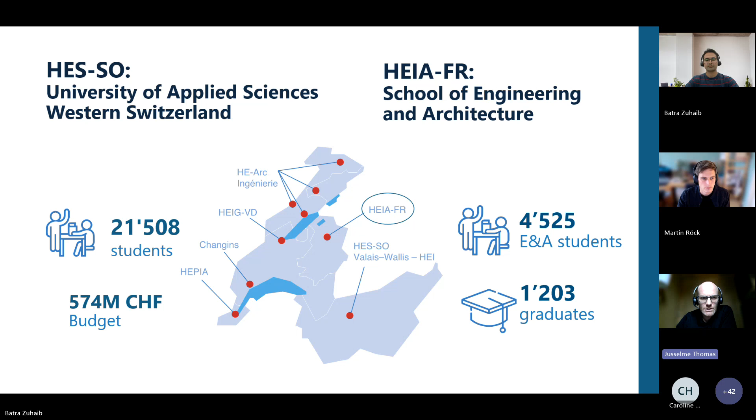As a short introduction, I would like to introduce our institution. So we are part of the University of Applied Science of Western Switzerland, and more specifically, we are the School of Engineering and Architecture of Fribourg. We have 10 research institutes, and we are part of the Energy Institute in between industrial technologies and construction and environment. At the Energy Institute, we also focus on the applied research in energy systems.

On my side, I have a contribution at the building scale and more specifically about life cycle assessment of buildings, carbon budget of buildings, early design methods, including the life cycle assessment and environmental impacts. We are part of a couple of research projects, like, for instance, the BioLoop projects that were focusing on bio-based material and their contribution into the biogenic carbon storage effects at the building, but also the building stock scale.

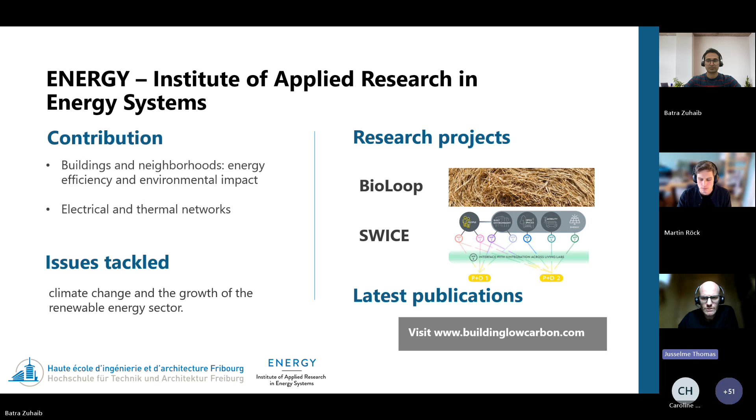So we are here today because, as we all know, we need to meet climate goals. And the building environment is responsible for 40% of the climate change, and more specifically 10% for the building materials themselves, with what we call the gray energy or the embedded emissions. And we are in a really specific sector with a large lifespan of buildings where the inertia to change buildings and to decarbonize this building sector is really challenging, with a very long and complex value chain.

And we feel and believe that there is a lack of awareness about the latest research outputs. And also we need to support policymakers and to fill policy gaps. So this is why we decided to start this webinar series by sharing our latest research findings, but also by inviting key researchers in that space. This is why we have Martin with us today.

So we also know that we have a kind of momentum at the European scale because we have the EPBD that will come into force in 2028 with buildings that are more than 1,000 square meters, with regulation that will be transposed in all the EU member states in 2026. In Switzerland, we have the chance now to have a norm, the SIA 390, that determines carbon thresholds for buildings. And we have progressive and new regulations in different European countries, starting from France, that have massively regulated this space in 2022.

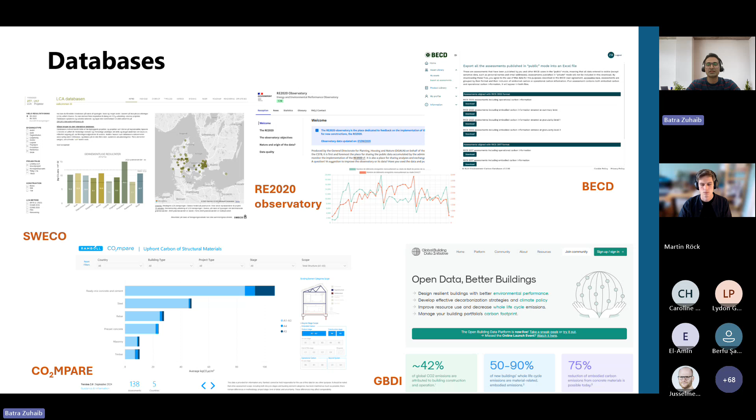We understand that there are some core challenges, and let's try to break them down. The main issues are data silos and fragmentation. Each country's database is very, very different, and there are different calculation methods at national level on whole life carbon assessment. We know there's a Dutch method versus the French method, and they're all different based on the climatic conditions. This causes the results to be really inconsistent.

And what is happening is that there are different tools, they give different results because the underlying assumptions are very different. The second most important issue that we are facing right now in looking into LCA data is the common schema or reporting schema, where a shared language is there for building LCA.

We have a very good example of BIM, where IFC formats have been used for more than a decade now, and it's used as a very common language in exchanging information between building information modeling users. Similarly, we are missing something like this at the global level, or I would say even at the European level. And this is one of the challenges, and there is this complexity around that, and we have to solve this complexity by research. We need data not only for submission, but it should also be structured, verifiable, and trustworthy.

We are having challenges in structuring LCA data because there are several types of different practices at national level. Some people are working only at a very coarse level, some are going into very much detail, some are reporting it in their national classification systems, whether it's architects or engineers. So there's a lot of, I would say, disaggregation in how things are reported and how they're understood, and often the quality of information is not very reliable.

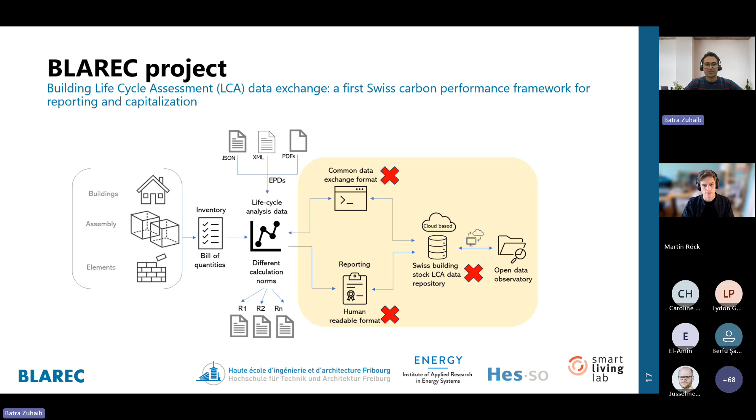Now, there is an approach that we are following. I would like to share that with you very briefly on the screen. In this, we are working with several LCA data, which we have collected from industry partners, and we are developing a dotLCA Python package, which includes a JSON schema. And also, we are applying large language models to really extract the data from what we have received from industry partners. We have included stakeholder feedback to understand how this schema should be arranged, and also develop a JSON, which is known as .lca, for data exchange and reporting.

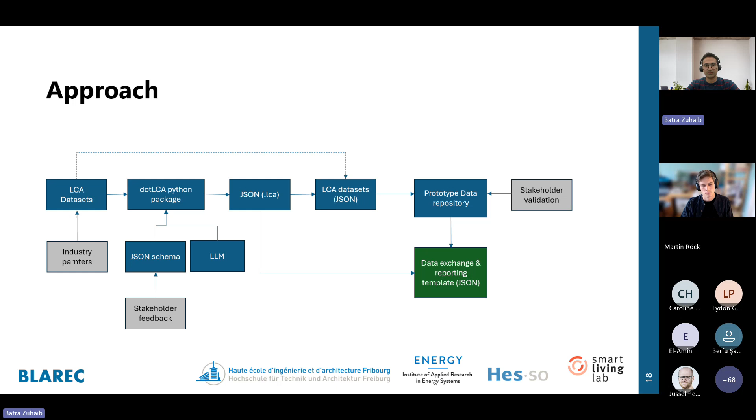Finally, using these JSONs, we will transform the data that we have into a prototype data repository. And as an outcome, we'll have a format which is tested on the data that we have received in this project. Building LCA data exchange is really important because there is a series of exchanges happening between different stakeholders, as we know, between engineers, real estate developers, investors, or even public authorities for their decision making. LCA data is the center point of a lot of stakeholders in decision making.

I think we need to really step up, understand the research course where we are working, and try to focus on these exchanges and try to develop solutions which are not only holistic in one way, but also focus on the issues that each of these stakeholders are facing. So we need to understand the value chain very clearly. I would like to share some examples of a survey that we conducted and is still ongoing. So these are some preliminary results.

And we asked different building professionals about the formats that they are using to exchange LCA data. It was very surprising to see, of course, no doubt, Excel files dominate the landscape, and PDF reports are second to none. So it is very, very challenging that these two formats are not really machine readable. It is very difficult to use them. They can be huge files and heavy files. Imagine tens of thousands of data existing in these kinds of formats. So we need to really solve this issue and have something which is easily interchangeable and interoperable.

We also asked some of the respondents about the common issues that they're facing while exchanging the data. One of the issues is, of course, the lack of clarity on assumptions and system boundaries. And we understand that in LCA, we have a lot of assumptions taking place, and these are often not reported in the reports that we have been submitting for building LCAs. So it is very important to overcome this issue. Missing, incomplete data: often there is not a lot of data which is required at granular level to understand LCAs. So this is something that we observed.

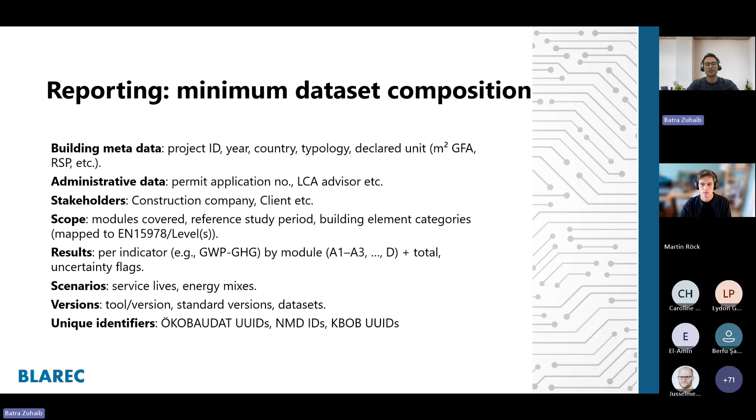So we have identified these requirements and we have started to work on building a schema in JSON. Also, one of the important things that we come across is building element classifications. This is one of the foundations of building LCAs. We know in different countries, there are different ways to create a bill of materials or bill of quantities. And this is the material level information, often classified as structural work or foundation work or painting work. There can be several categories in which it is identified.

But what we need to know is that across the world, there are so many different kinds of systems existing, which makes it practically impossible to translate one form of information from one country to another. That is why these classification systems hold a very important role in our understanding of how data is exchanged within the value chain. In our analysis, we have analyzed Uniclass, CoClass, ECCC systems, which are very widely used and often very comprehensive in reporting different products and materials and processes under pre-specified categories.

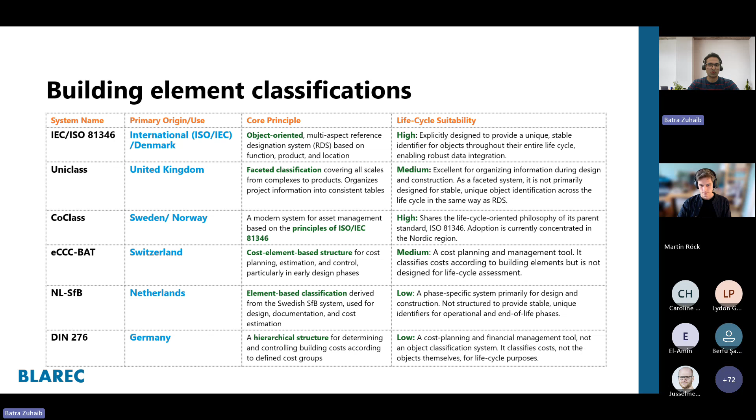This makes things a little bit easier to understand and classify materials in LCAs and also share them across the value chain. So this is something that we are analyzing in our work, and our structure of LCA data reporting and exchange will definitely be influenced by these building element classifications, which may in future be possible to exchange from one country to another, but that is a long way to go.

Finally, to wrap up, we know that building LCA is here to stay in the next decade. Our current reporting infrastructure is really not fit for purpose. So focusing on open standards, mandating machine-readable formats, and fostering an ecosystem of connected tools is what we need to really unlock the potential. We need to develop open standard schemas, based on XML or JSON, to share building level LCA results. What is also not yet in the picture is mandating in policy how these machine-readable formats should be used. Maybe EPBD could consider it as a recommendation and start influencing policymakers on using a specific format for exchanging this data.

So I believe we have several paths, encouraging even software developers to work with open APIs and try to exchange data in formats which are easily accessible and available. There are already some good practices in Denmark or in France in this direction. I think we need to learn from them. We need to use specific data converters, which are easily available and also connected to national portals who can use this information or exchange it with interoperability.

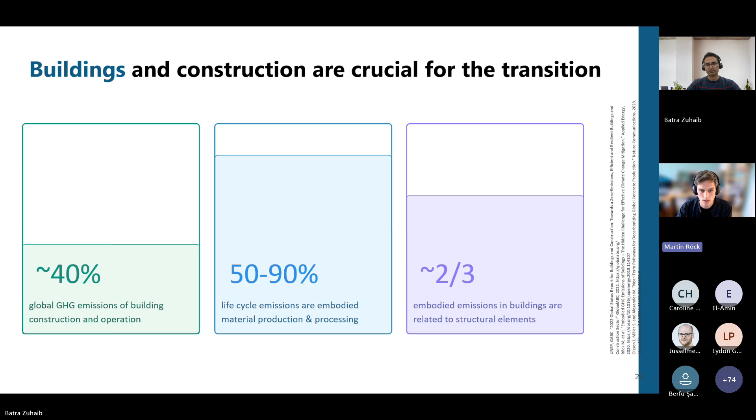So I will be brief on those because you already understand the context. The built environment is very relevant. We know it's around 40% of GHG emissions globally. We also know that, especially for new buildings, the embodied material-related emissions are of increasing importance. Our research shows that 50 up to 90% of life cycle emissions for new buildings are actually related to material production and processing. And within those embodied emissions, around two thirds are often linked to the structure. It depends on the complexity of the building system, but often the structure really plays a key role.

And now I realize that animations will not work well in this setting. Anyway, we will skip over this.

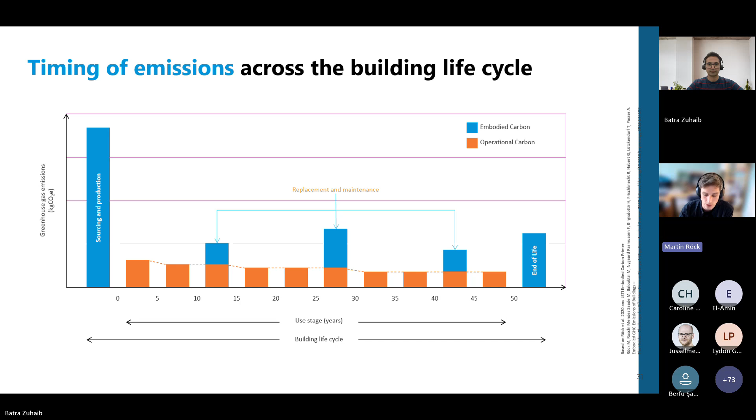And that's really also part of the reason why we call for action on embodied and whole life carbon emissions, especially for new construction today. Because the thing is, we know that there are many solutions already available to reduce, especially those embodied carbon emissions. Great progress has been made already on operational carbon, but on embodied carbon, there are also great solutions available. We could reduce embodied emissions by 50 to 75% with the strategies that we have today.

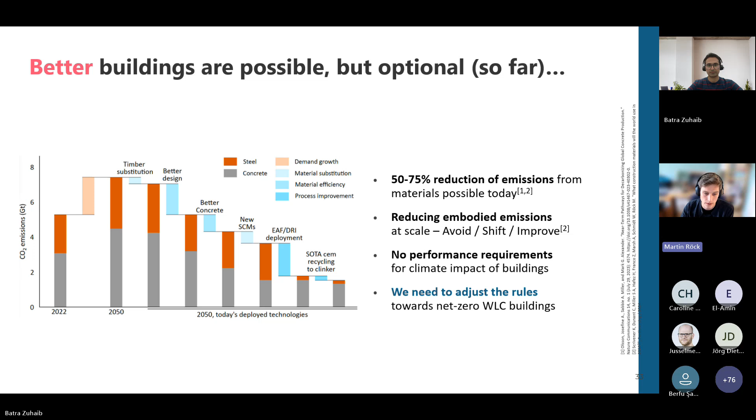The problem, as Zuhaib already said, is that we currently don't really have performance requirements on these embodied carbon emissions in most parts of the world. And that is why also my work and our work has focused on really adjusting the rules towards net zero whole life carbon buildings and making sure that we inform policy in a way that increasingly incorporates these embodied carbon emissions in the regulation. Zuhaib already spoke briefly on the European perspective.

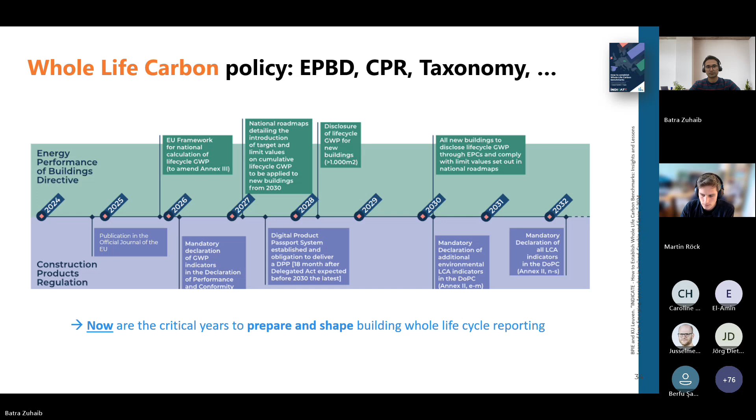Part of our work in accelerating the uptake of these forthcoming regulations and also informing these requirements is the Indicate framework, which is a framework for accelerating whole life carbon data and policy creation. And those of you who are interested, you can look it up, indicatedata.com. It's a framework that we are now deploying in the second phase. We have worked with 3 pilot countries, Ireland, Czechia, and Spain in the first pilot.

Now in the current pilot funded under the European LIFE program, we're working with partners in Italy, Croatia, Austria, Hungary, and Luxembourg to really support them on this duality of developing the data and the assessment methods on the one hand, while also developing really specific whole life carbon policy proposals and working with stakeholders, also with policymakers, towards policies and the implementation of these European trajectories at the national level.

Now, what we're also doing in parallel, not just on the individual building level, but we're also working at the building stock level, because for policymakers, it's quite relevant to understand, yes, on one hand, what can be done on the individual building level, but often that is quite different from what can be done at scale at the national or the European building stock.

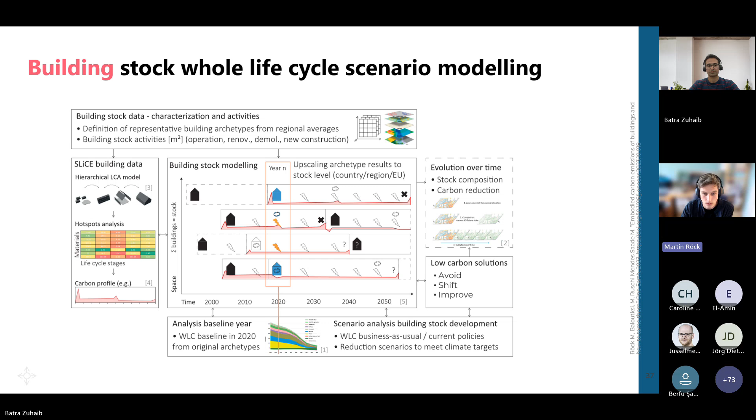So we model all of this at the national and transnational scale to really then investigate the evolution over time and the potential of different low carbon solutions to really reduce emissions or maybe even activate carbon removals at the European and at the member state level. The way that we go about this is by modeling archetypes. So we build on statistical analysis of the construction activity, of the composition of the European building stock.

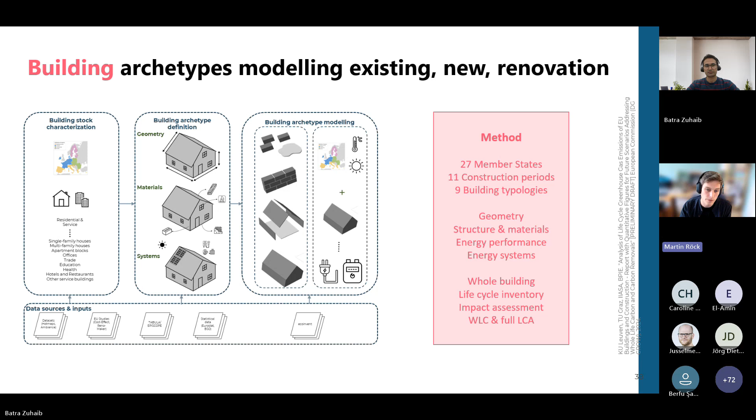And in this project that I'm pointing to here, you can again find it online. It's for the European Commission DG GROW, a preparatory action on the life cycle emissions and removal potentials of European construction. For this project, we really modeled archetypes for all the 27 member states, considering different construction periods, 11 periods, 9 different building typologies, also going into the nuances of geometry, of structure and materials, of different energy performance and energy systems to really model comprehensive life cycle inventories and then conduct whole life carbon assessments and LCAs.

Now, the final reports of this project are already delivered, and there are a number of publications that will be coming forward. So this is just to give you an idea and keep you excited about what's coming, because there are around 10,000 building LCAs that we modeled and that we plan to publish to a large degree in the coming months, so that you can also look into these numbers and understand the contribution of different materials, the contribution of different building elements, really benchmark this data for different building types across different member states.

We also have a specific analysis on the carbon uptake potential, and so in that sense, the carbon removal potential of different types of buildings, considering both biogenic removals as well as mineral carbonation and mineral removals. I think that is also giving quite an interesting insight into the potential and also the limitations of these different approaches.

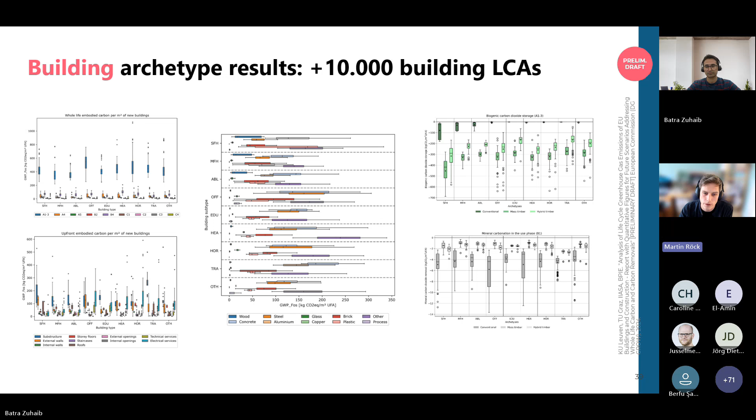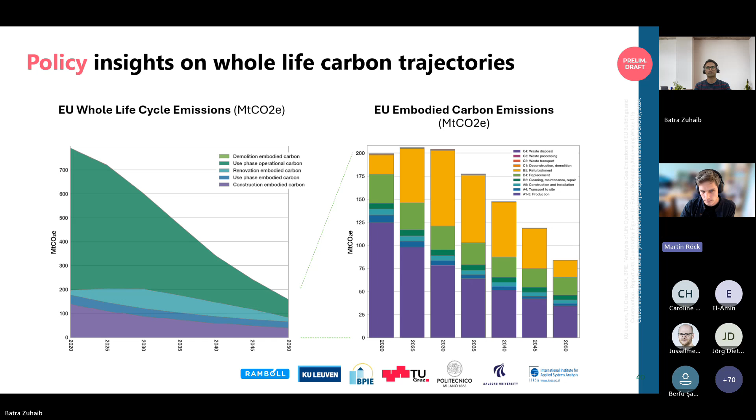Now, these results for this particular scenario, as well as for other scenarios, are available online. I invite you all to have a look at the Whole Life Carbon Scenario Explorer. We have a dedicated website that will point you to an interactive dashboard where you can explore different scenarios, play around with different strategies, activate them to a higher or lower degree, and then really explore the results in your own time. You can filter them for individual member states or for individual building parts, look at different materials, different life cycle stages. All of this.

And this is available also through the QR code. We also have a paper pending. The code for this is open source. So if you're working on something similar, you can build on it. Feel free to get in touch if you want to learn more about our experience in also developing this tool, which is really intended to support policymakers.

Now, I'm moving away from Europe because the reality is that the global floor area is expected to double, yes, but it's expected to double not in Europe and not in Northern America, but actually in other places. It's expected to increase a lot in places like India. It's expected to increase dramatically across the different parts of Africa. And that is part of the reason why our work in recent years has moved increasingly to the global level and to partnerships with Global South actors. Because the new construction will really mostly happen in the Global South.

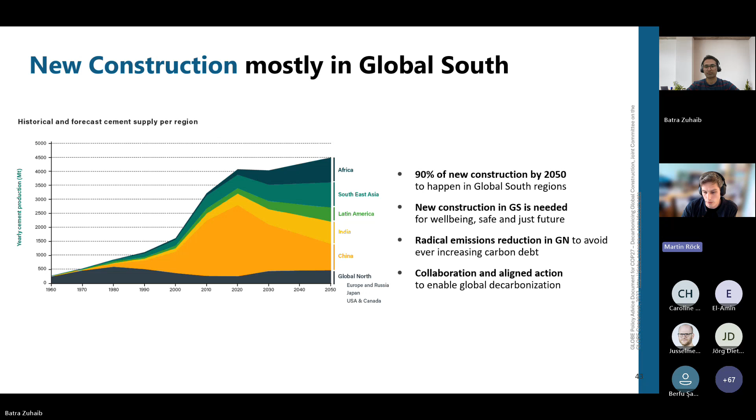Now, to work with partners globally and in the Global South specifically, we have developed the Global Building Data Initiative that was already mentioned briefly. As part of the Global Building Data Initiative, we have developed a data model, the Open Building Data format, and we've developed the Open Building Data platform, which is a free, open access and also open source platform that enables you to benchmark existing data. So here we upload all the data that we can gather from around the world and really make that accessible to engineers, to architects, and to policymakers. And again, that's an invitation to have a look at that.

The Open Building Data format really emphasizes this very detailed reporting of material inventories. So we really look for data where we can get the detailed quantities and also the detailed specifications of materials, because we believe this level of transparency is crucial for understanding the data and also understanding where the differences are in the different buildings, and not just have aggregated numbers of emissions at the end of the day.

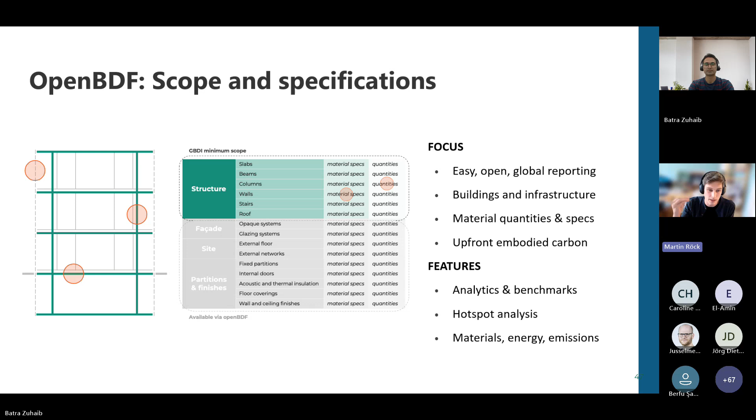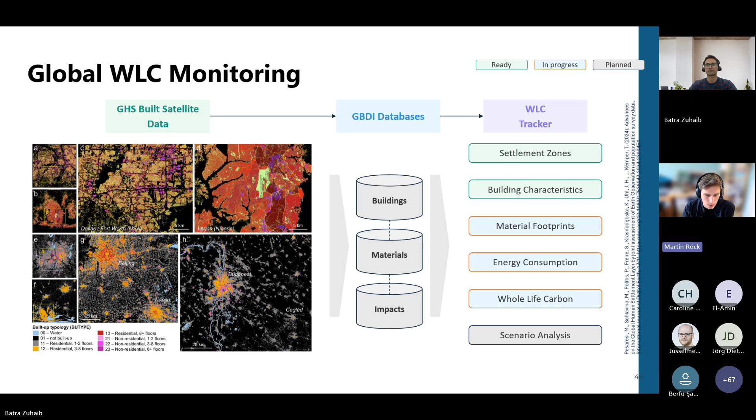The next step, and with this I'm already concluding, is to again take this work at the global level from individual buildings to global building stocks. And there we have started to work on global whole life carbon monitors and trackers to combine satellite data with the databases that GBDI is managing, to really get a sense of where the material footprints are at the moment, what the whole life carbon emissions are, and again work towards scenario analysis at this global level.

And yeah, actually I can click it.

Okay. So I think the key takeaways for you are that solutions are readily available to reduce whole life carbon and embodied carbon at scale. This is true in Europe. This is also true in other parts of the world. For Europe, more and more holistic effort is required. We need higher renovation rates and depths. We need to decarbonize space heating and hot water production.

Low carbon material production, obviously that's already set and many policies are pointing in that direction. I think where we need to improve is actual circular and cascading material use today. So that is not just about preparing buildings for reuse or for disassembly in the future, but it's about using reused materials today and obviously maximizing the use of the existing building stock.

In that sense, sufficiency strategies are very interesting, especially as they can be very effective today, more today than in a decarbonized future. And it's always important to consider this distinction of global north and global south, where in the global north, it's really about reducing the new construction activity to free up resources for the massive renovation effort that we have ahead of us. While in the global south, it's about partnering with local actors to enable low carbon and climate resilient buildings to really support well-being on the ground.

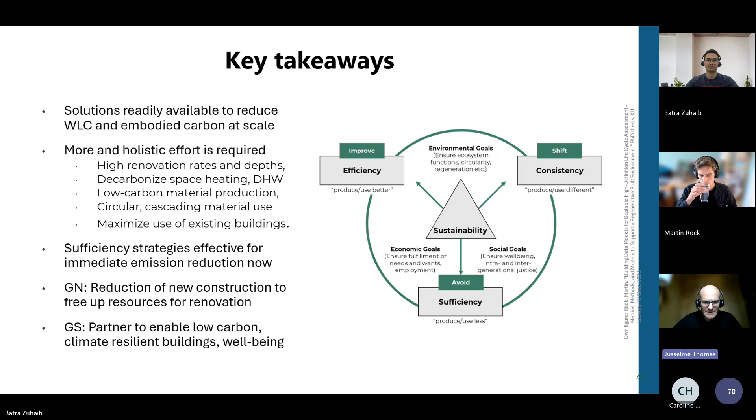But maybe a first comment coming from Thomas Fedrizzi. That's true that during the introduction of Zuhaib, we did not mention the fact that there will be a new MoPEC or MoPEC 2025 under revision that will lead to have a new embedded carbon threshold in all the cantons. That should happen in Switzerland in 2029, if I remember well about this revision.

Now we have a question, I think, for Zuhaib. What do you think about performance-based functional units like thermal conductivity, durability, mechanical strength? What can you say about this? Thank you for the question. It's really interesting and a very important one, which is, I would say, very popular among professionals who are working with mass-based metrics. So in LCA, we have a lot of focus on mass-based metrics. And to really enable fair comparison between materials, considering performance-based metrics is also very important.

As you know, one material is known for what purpose it is good at. So keeping the environmental criteria in the picture, I think there's a need of databases which can basically highlight the differences between different material types that are being used based on their performance criteria and also based on their mass, basically the environmental impact. So I think it is important to consider this also in the policy making, because this is going to become a very emerging issue in practice, as a product which is highly efficient may not be really good at environmental performance, and a product which is really very good in environmental performance might not have a very high efficiency.